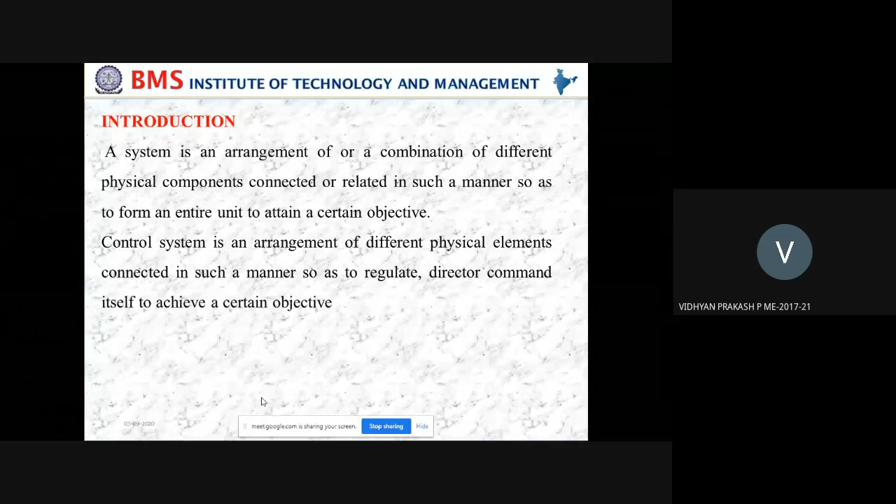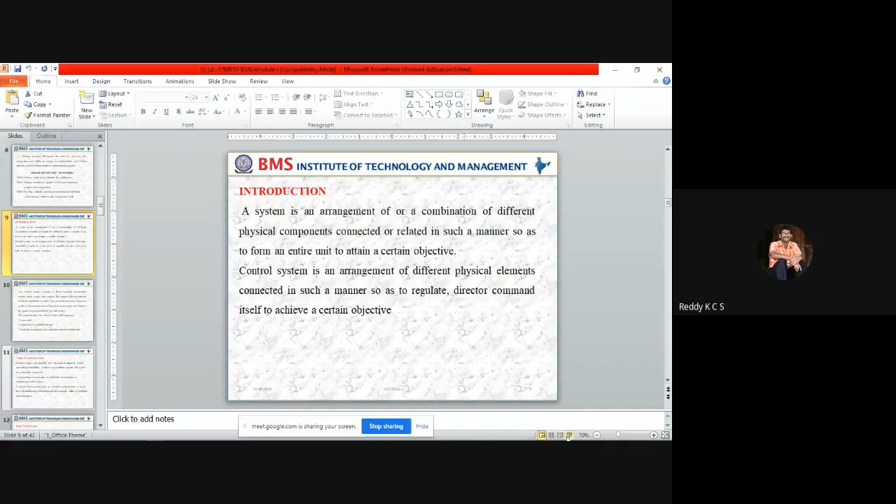Today we discuss the introduction to control system, module 1. Before going to the introduction, we know that the concept of automatic control has taken a very important position in the advancement of modern science. Automatic control systems have played a very important role in the advancement and improvement of engineering skills

or technical skills. If you look at your day-to-day life, every day is influenced by some sort of control system. The concept of control system also plays an important role in the working of space vehicles and satellites, because we are controlling these satellites and space vehicles from remote locations, and guided missiles. These are all done through control systems only.

Such control systems are now an integral part of modern industrialization and industrial processes, and also home appliances. For home appliances like a geyser, we can have a control on the temperature, and in an oven we can control the temperature as well as the time. You can take the water purifier system also. We have different control systems in home appliances, and the fan as well.

Control systems are found in a number of practical applications. We have computerized control systems; in chemical industries we can use computerized control systems, and in mechanical industries CNC machines, computer numerically controlled machines. Those all come under computerized control systems, as well as transportation systems, power systems, temperature limiting systems, and robotics. We can say many are there.

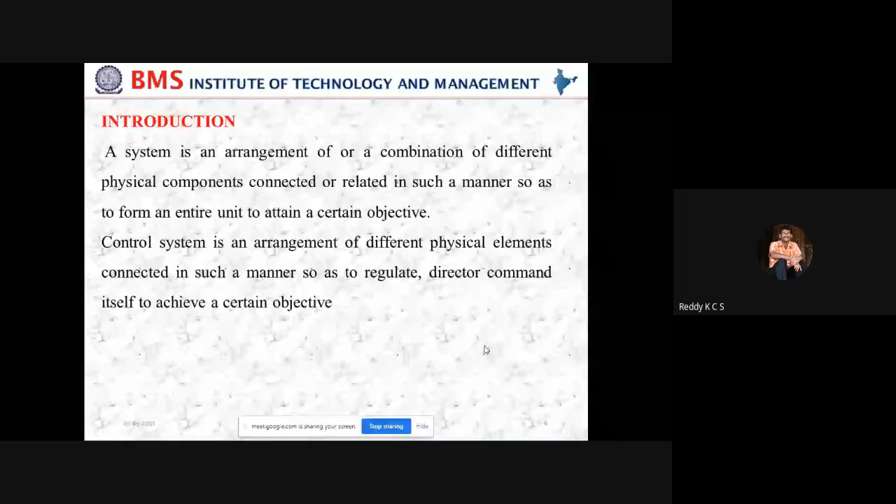And any control system, if you take, consists of three essential components. One is input. Generally we call it input, but in control terminology it is called a reference input. And system, or we can call it a process or a plant. It has a number of names; the thing we are going to control we can call a system, a plant, or a process. In chemical industries, we can call it a process. And in mechanical industries, we can call it a plant or equipment or a machine. So likewise, we can call it in different ways.

And one more very important component is output, because that is the one which gives the desired output, or when you have the controller on the system, it is called a controlled output. So in control terminology, it is input, system, and output. Input is referred to as a reference input, and output is referred to as a controlled output, because we are getting the output as we are using the controller. That's why it's called a controlled output. So these are the three very important elements in any particular system.

And one more element, as I told, is the controller, and one more which is not actually present in the system, but is an external element which disturbs the system. That is called a disturbance. So the process or plant or system can be defined as the portion of a system which is to be controlled. Other than these three basic elements, we are going to use one more, called a controller, in between the input and the system.

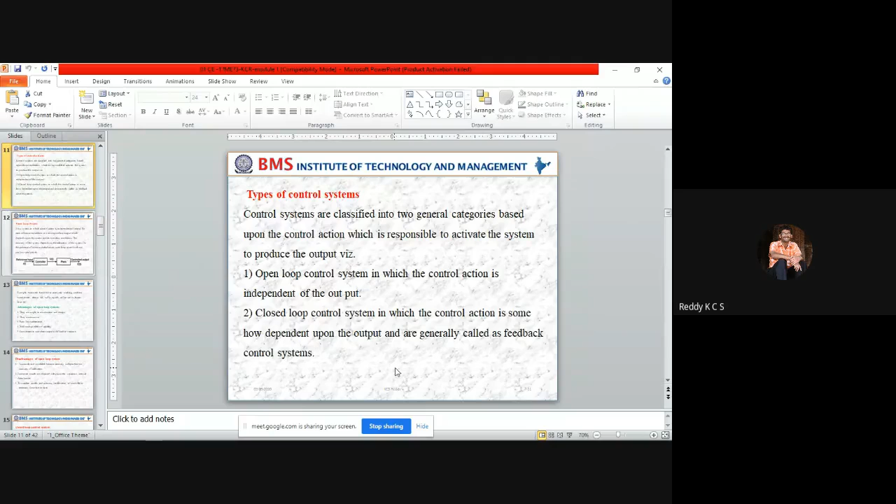So we discussed the different classifications of control system. Other than these three, we also discussed time varying and time invariant control systems. A time varying control system is one where the parameters of the system vary with time. Where the parameters of the system are not varying, or are independent of time, it is called a time invariant system.

And we also discussed continuous time and discrete time control systems. A continuous time control system is one in which the system variables are functions of continuous time.

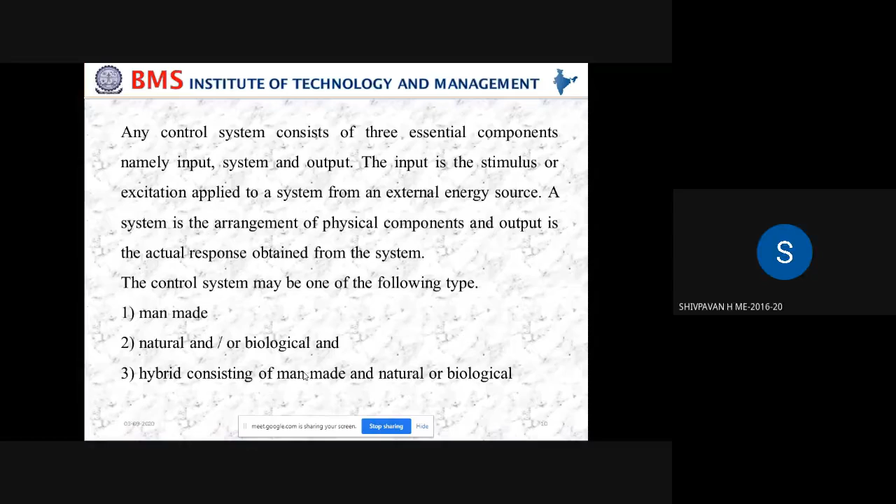Sir, which slide are you sharing? Hello. Which slide are you sharing, sir? No, this classification I have not put in the slides. Other than these three, which we discussed previously, I'm just giving definitions. As per your syllabus, I have put open loop and closed loop control system. But other than this, we have more: lumped parameter system, distributed parameter system and all those. That is what I'm discussing here.

Okay. When I define a particular control system with ordinary differential equations like d²x/dt², then it is a lumped parameter system. When a control system is described by a partial differential equation, that is ∂²x/∂t², then it is called a distributed parameter control system. And single input single output, we know, has one input and one output.

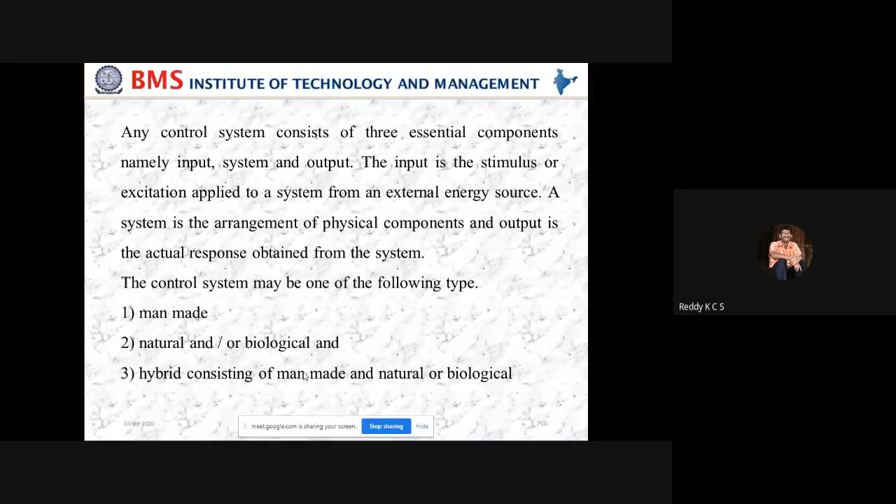Almost all open loop control systems are single input single output control systems. For multiple input multiple output systems, the washing machine itself is a big example. So other than these three, we have discussed around 5 to 6, but still open loop and closed loop control systems are very important from your syllabus point of view. Now we will come to the types of control system: open loop control system and closed loop control system.

An open loop control system is defined as one in which the control action is independent of the output. It means that whatever output you get, it cannot have any control on the output. That is what you call an open loop control system. It doesn't have any controlling, regulating or directing of the output; it is totally independent of the output. Okay, so a system in which the output is dependent on the input.

Here I can say its output is dependent on the input given, but it is not dependent on the output. Output depends on the input. I mean, the controller cannot take any action on the output. So here, an open loop control system is one in which the control action is independent of the output, but not of the input. So we can define very clearly a system in which the output is dependent on the input.

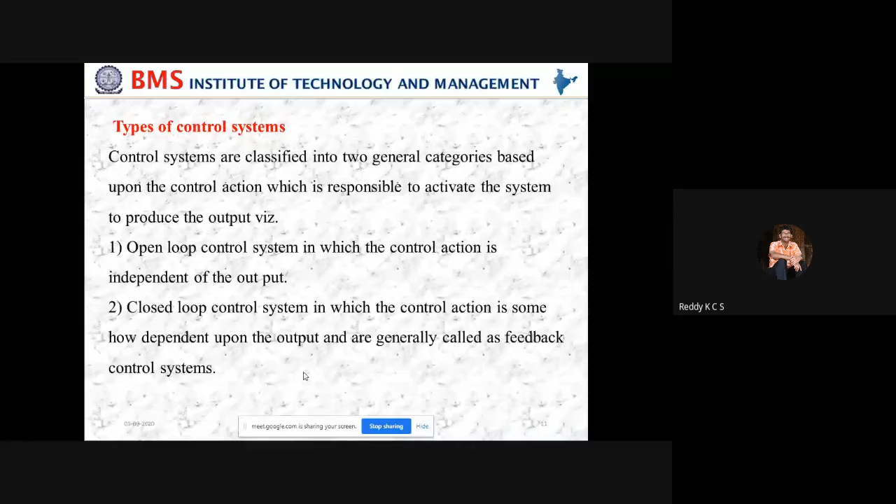So the basic definition of control system, open loop control system and closed loop control system is very important. In a simple way, the open loop control system is one in which the output is dependent on the input, but the control action is totally independent of the output of the system. Similarly, the closed loop control system is one in which the control action is somehow dependent on the output, and it is generally called a feedback control system.

So next, coming to a broad explanation of the open loop control system, in short the open loop system. As we discussed, it is a system in which the control action is independent of output. And here there is a reference input. As I told you in the beginning of the class, any system will have input, process, and output. But in the control system, the input is referred to as a reference input, and the output is called a controlled output.

Why is it called controlled output? Because we are using the controller to get our required output. So for each reference input, there is a corresponding output, and the accuracy of the system depends on the calibration of the system. Generally the closed loop control system has higher accuracy than the open loop control system.

In the presence of noise and disturbances, the open loop control system will not perform satisfactorily. Because if there is any disturbance in the plant, within the process or within the system, the controller cannot take any effect on this particular process, so the output will not be obtained properly. That's why in the presence of noise or disturbance, the open loop control system will not perform satisfactorily.

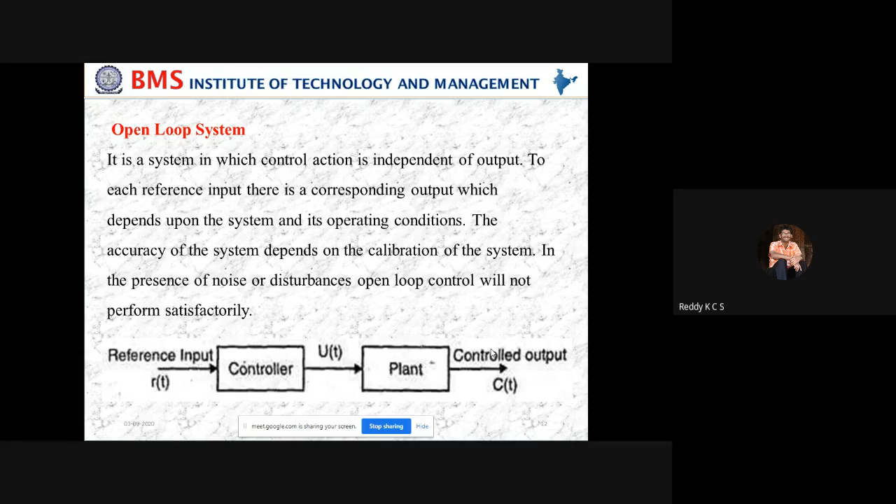Generally the open loop control system is represented in this manner: reference input, then a controller between the reference input and the plant. The controller signal is given to the plant, and then it gives the controlled output. For the open loop control system, we can take n number of examples: the automatic hand dryer, automatic washing machine, bread toaster, traffic signal, and so on.

So here I'll just explain a simple example, the traffic light controller. You can go through the other examples on your own. In the traffic flow control system, which you might have seen in daily life, we use time. Time is the dependent parameter, right? So here it doesn't depend on the flow of the traffic.

So the flow density of the traffic, or density of the traffic, we can talk about. So it cannot depend on the density of the traffic, but it is only time dependent, means there is a time interval given, 60 seconds, 90 seconds, or 120 seconds, depending on the locations. Okay, the traffic on the road is not constant, right? Sometimes during the morning time it will be more, and during midday it will be very less. In the evenings, once again, it will become more traffic. So it is not so constant. It's very different. It depends on the time.

So here the sequence and the duration are controlled by only relay switches. So we'll be having the relays here controlling your times. That means red to green, or green to yellow, and this is controlled by your time duration. It is not controlled by looking at the density of the traffic at a particular way. So that is why it does not depend on the output. It only depends on the input. Means input is given as relays, that is time intervals. So that is why it is called one of the open loop control systems.

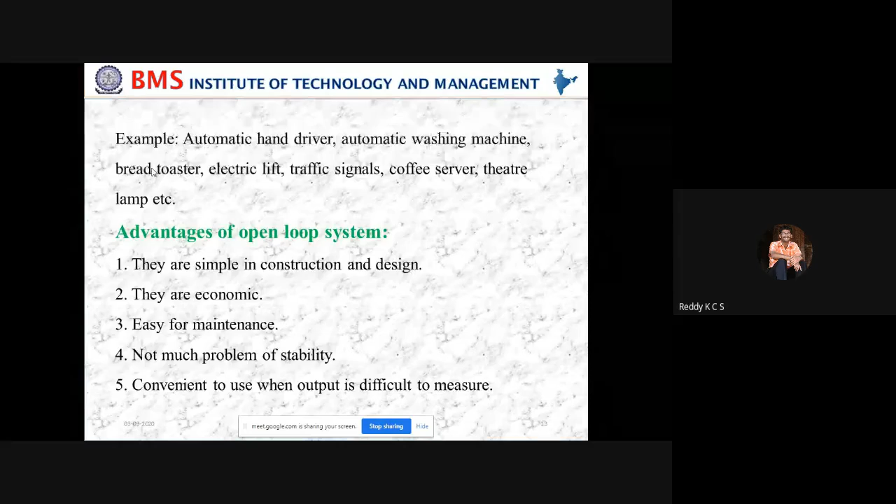So coming to the disadvantages of the open loop system. As I told, it is not accurate, because the control action is totally independent of the output. That's why it gives inaccurate and unreliable results, because accuracy is dependent on the accuracy of calibration. So we discussed that in the open loop control system, accuracy of calibration decides the accuracy of the control system. As there is no controlling on the output, these systems are inaccurate and unreliable.

And also, inaccurate results are obtained with parameter variations and internal disturbances. Any disturbance in the system cannot be sensed by the controller, because after the controller the plant or process is there, and this disturbance cannot be given back to the controller. So that is why this gives inaccurate results. So that is one disadvantage.

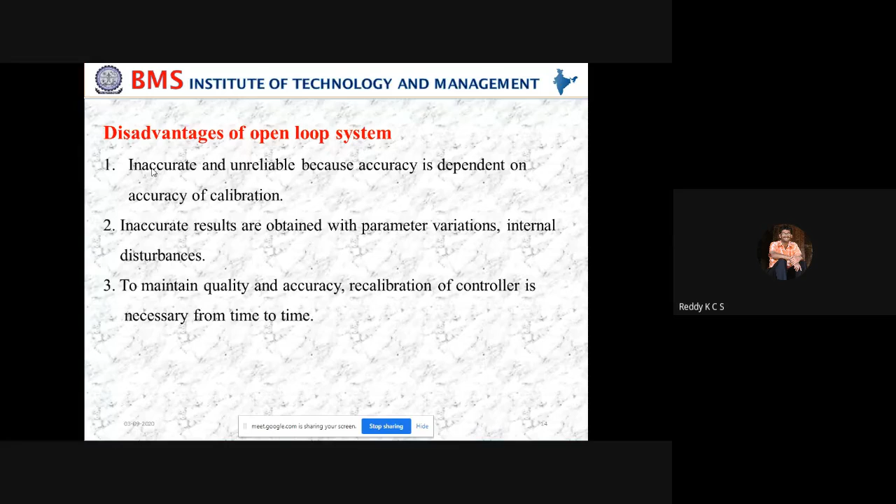And also, to maintain quality and accuracy, recalibration of the control is very necessary from time to time. So if I want to maintain at least the quality of this control system, recalibration of the controller is very much required. Okay, so these are the disadvantages of this open loop control system. And we go with closed loop control system.

Okay, so the closed loop control system is a system in which the control action depends on the output. As we discussed, the system in which the control action depends on the output is called a closed loop control system. Whereas in the open loop control system, we told that the control action is totally independent of the output. Here, control action depends on the output.

So in the closed loop control system, the actuating error signal, which is the difference between the input signal and the feedback signal, is going to be generated by the comparator. The elements of the closed loop system are command, reference, and error detector. Error detector is also called a comparator. So here, the difference between the input signal and the feedback signal is nothing but error. That is how we generate the error by the comparator.

A device called comparator is there to generate the error by comparing the input signal and the feedback signal, and this error signal is fed to the controller to take the control action on the process. So that is how the closed loop control system works, how the error signal is generated. The difference between the input signal and the feedback signal is fed to the controller, and the error signal is generated by the comparator.

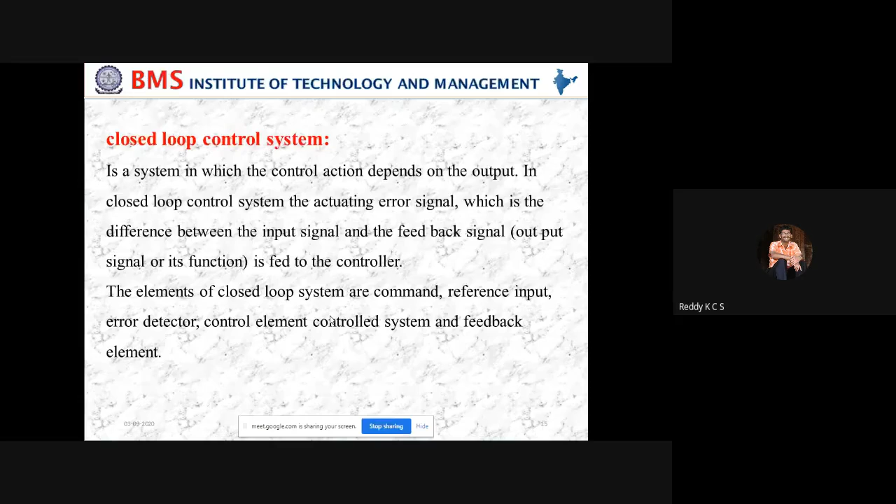So the comparison between the input signal and the output signal gives the error. That error will be given to the controller, and the controller then takes the control action on the process if there is any deviation in the output. So the elements of any closed loop system are command, reference input, error detector, control element, and very importantly, feedback element.

So here, this is a simple block diagram which represents any control system. If you look at this, we have a reference input, and this is the feedback element which sends the output back. Here is the comparator, where the input signal and the feedback signal both will be compared, and then it generates the error like this, E of t, which is input to the

controller, then it gives out the output, which is called the controller output. That will be fed to the plant if there is any deviation. Then the plant has to act according to this controller input signal here. Then it gives the controlled output.

So until the error becomes 0, this feedback element keeps working on it, and it gives the error signal to the controller so that it will take the control action on the plant, and give the error-free or zero error output. Then the control output will be measured. So here the accuracy of the system is high compared to the open loop control system.

Now the elements present in a closed loop control system. First is the command. The command is the externally produced input and independent of the feedback control system. The second one is the reference input, which produces the standard signals proportional to the command. And the error detector receives the measured signal and compares it with the reference input, and the difference of these two signals produces the error signal.

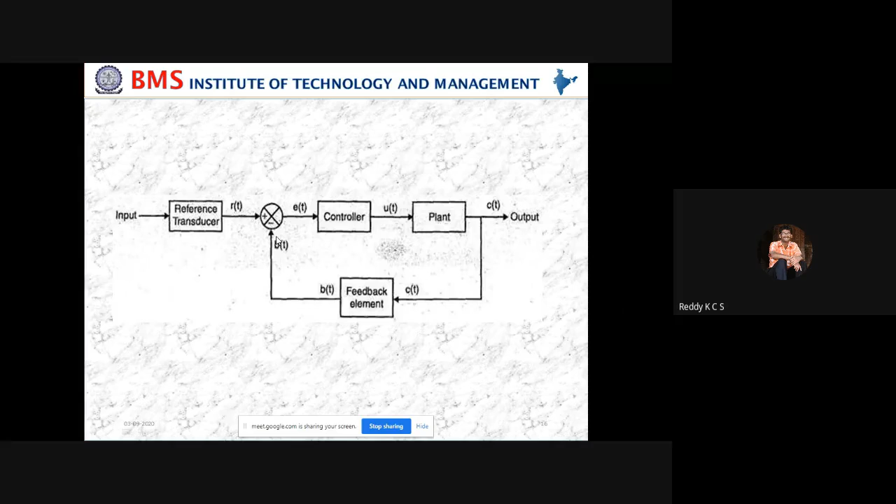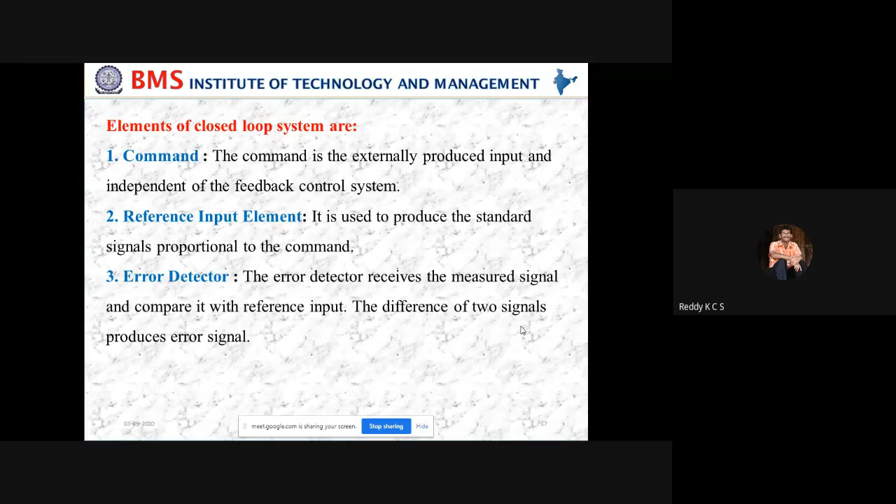It comes from here because we are measuring this output and giving it back to the comparator or error detector. So here the measured signal is going to be compared with the reference signal, and the error is going to be generated. The difference of these two signals is called the error. That is how the error is generated by the error detector or comparator.

Next, coming to the control elements. Very important is the control element in the closed loop control system. This regulates the output according to the signal obtained from the error detector. So the control element is going to act according to the error given by the error detector, and it regulates the output according to that.

Controlled system: this represents what we are controlling by the feedback loop. Without the feedback loop, we cannot get the controlled output. So the feedback element is very important in a closed loop control system. This feedback element feeds the output to the error detector for comparison with the reference input. We have examples; we'll discuss these examples in the next class.